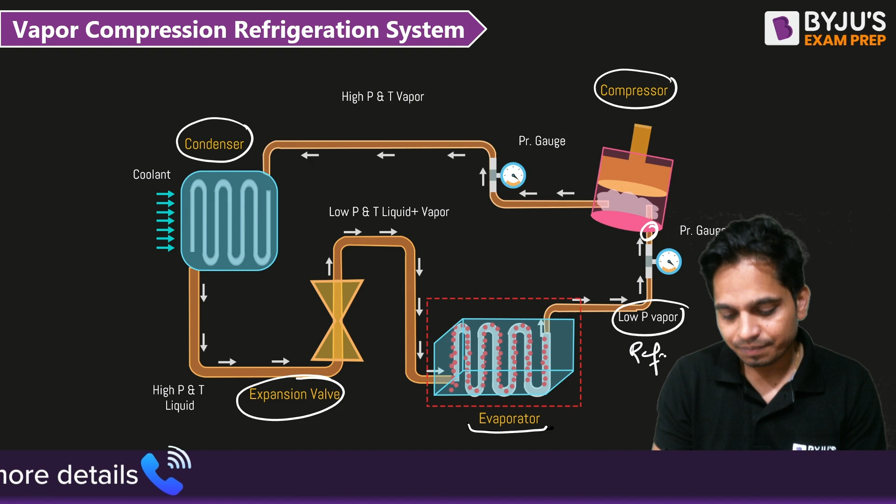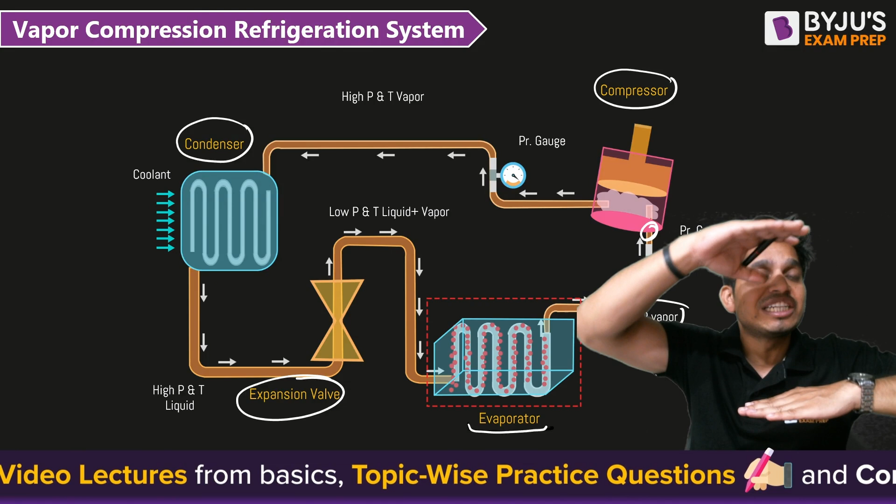So see, this is the compressor inlet. What is coming in? Low pressure vapor refrigerant is coming in. It is going to the compressor, and the compressor is going to compress it to higher pressure. So what is going out? High pressure and temperature vapor refrigerant.

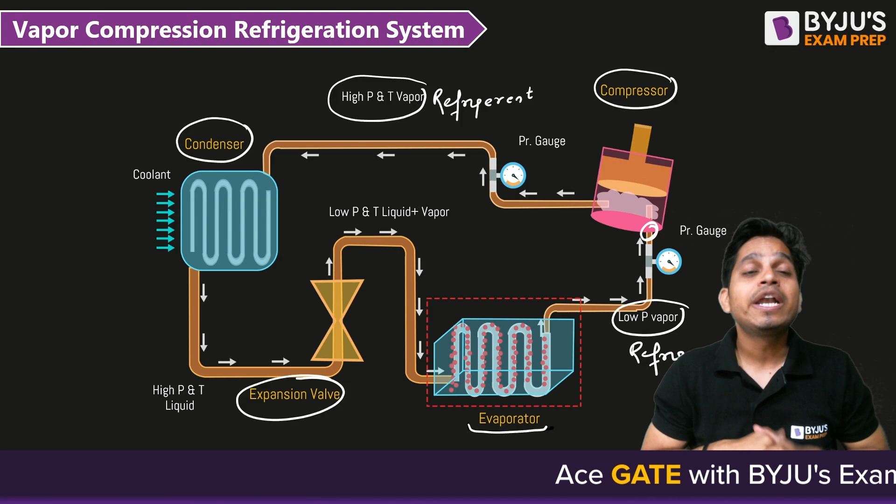Now entering the condenser you have high pressure and temperature vapor. What do you want? You want liquid. So you send it to the condenser. Out of the condenser comes high pressure and temperature liquid. And the liquid you want to send to the evaporator, so it has to pass through an expansion valve.

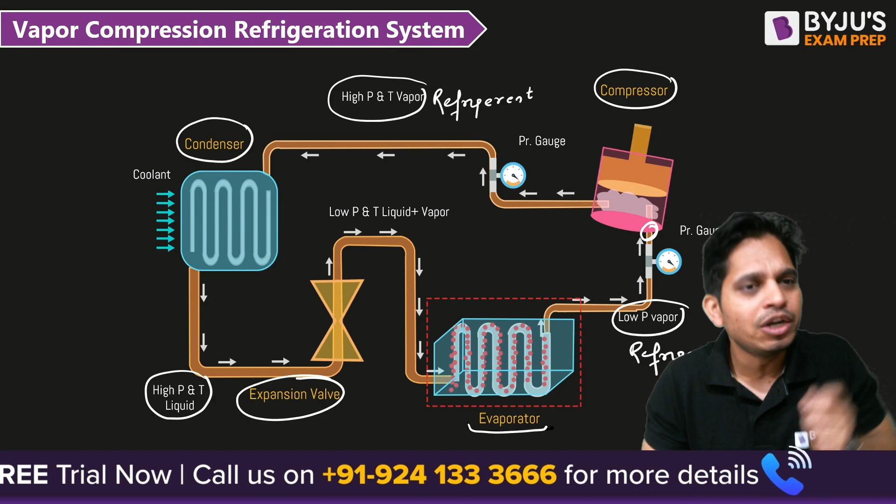Expansion valve is a very thin tube. We are going to see it later. Very thin tube, capillary tube, in which it will be converted to low pressure and temperature liquid. Most of it is liquid, a little bit of vapor. And then it again goes to the evaporator, where it absorbs heat to produce refrigerating effect.

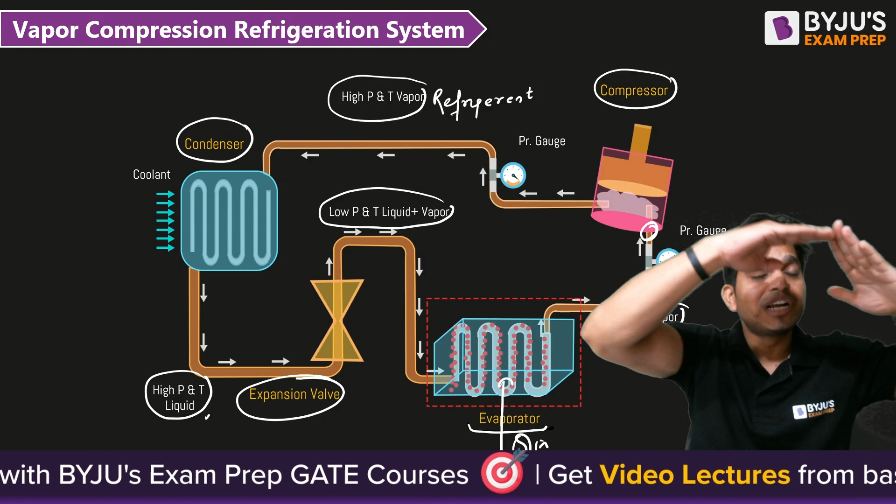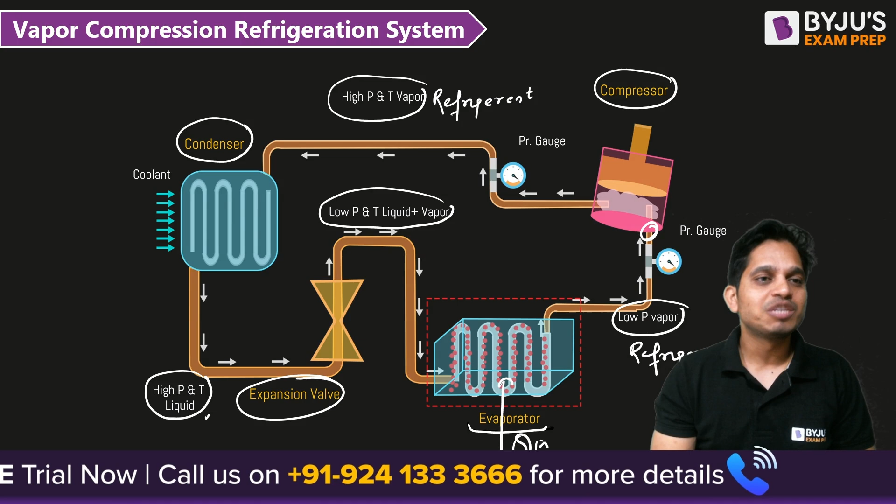So four main components: evaporator, compressor, condenser, expansion valve. In the evaporator, the refrigerant absorbs heat and converts into vapor. This vapor goes to the compressor. The compressor compresses it to high pressure and temperature. Then it goes to the condenser, which converts it to high pressure and temperature liquid. And then the expansion valve. So by using this combination of four components, we can cool a space, like our domestic refrigerator.

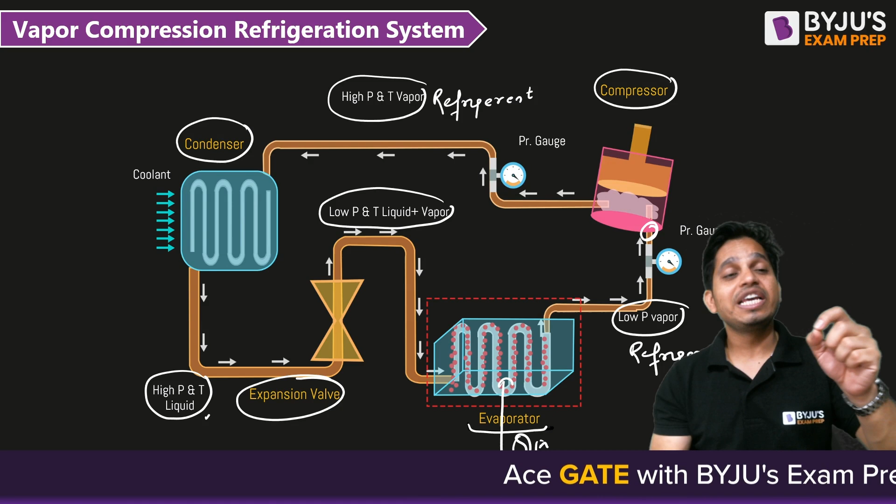So let us go quickly to our workshop and see where these four components are in your domestic refrigerator and how they work. Chalo, let's go there. I will see you there.

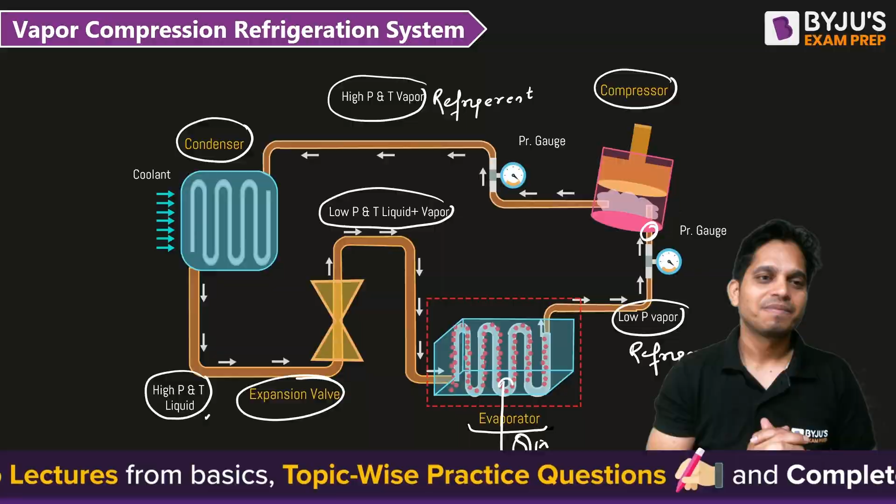Now in this Sunday Ka Funda video, we are going to understand how a vapor compression refrigeration system works. So how many components are there in a vapor compression refrigeration system? One evaporator, then it goes to the compressor, then condenser, then expansion valve. So what is the best way to understand the VCRS cycle? A domestic refrigerator.

हमारे सबके घर में domestic refrigerator होता है, so this is the best way to understand a VCRS cycle.

So let's try to understand what the VCRS cycle is and see the four components in this. Whenever you open the fridge, at the top you have the evaporator. ये जो freezer है, this freezer is the evaporator. In this evaporator, a mixture of liquid and vapor comes in from the expansion valve, and it absorbs heat that is generated inside the fridge, and it converts into vapor.

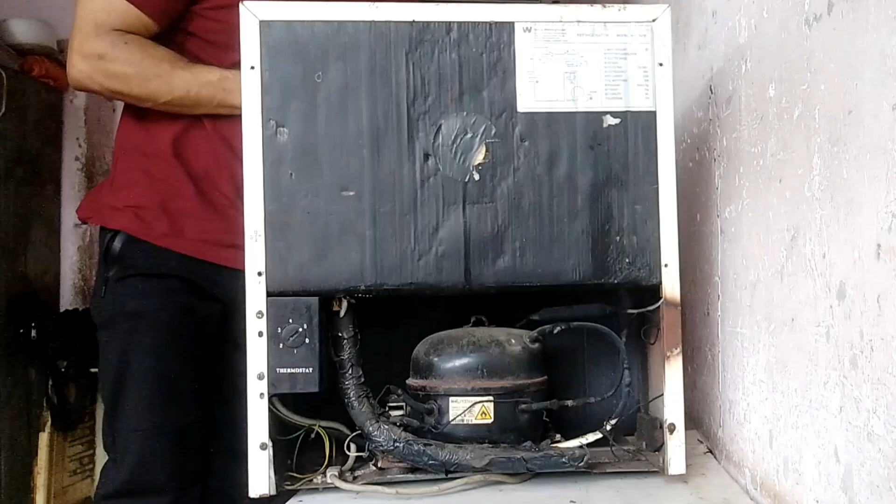Now from vapor, where does it go? It goes to the compressor. Where is the compressor in your fridge? So let us see. This is your compressor. You see, at the bottom of the fridge there is the compressor, this black box. This compressor is going to compress the vapor and send it to the condenser.

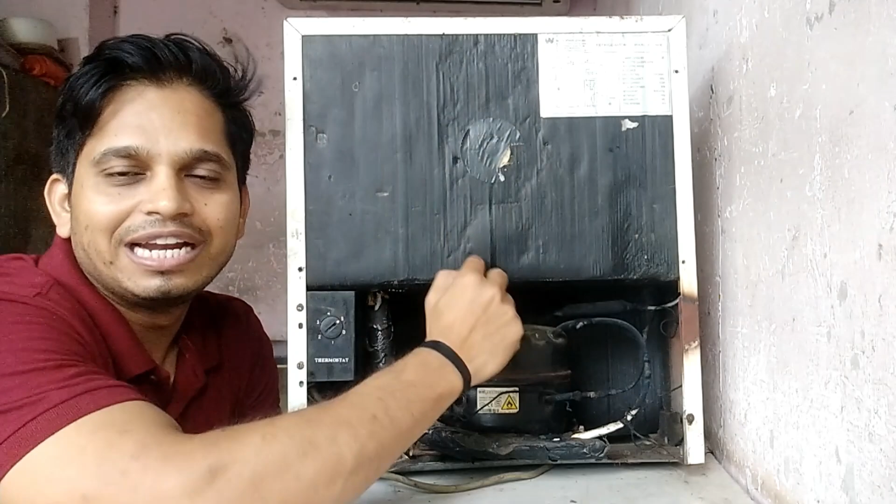Now how is it going? You see this pipe, this is the condenser. There is a coil here that you can't see, and that is the condenser. Heat is going out; it is rejecting heat to convert the high pressure vapor in the condenser to high pressure liquid.

Now you see this pipe is coming, this small thing. Now I think you can see. This is your expansion valve. It is coming out from the condenser, and you see a very thin pipe. It is to decrease the pressure and temperature of the refrigerant from the condenser pressure to the evaporator pressure.

And what comes out of this? Most of the refrigerant is liquid, but a little bit of vapor. And then it goes to the evaporator, where again it absorbs heat and converts into vapor. So the same cycle continues. This is basically the concept of a VCRS cycle.

What do we have? Evaporator; you see it is coming from the evaporator. You see this inlet, this is coming into the compressor. Then you see this white pipe going out to the condenser, and then it is going to the expansion valve, and from the expansion valve again to the evaporator. Got it?